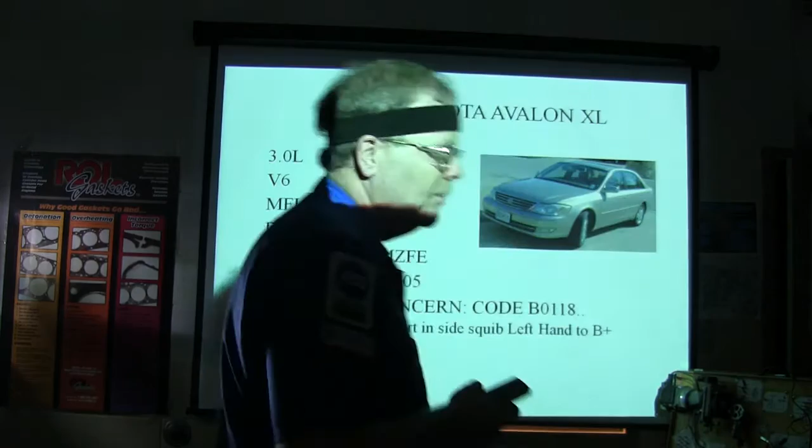We're going to go through a little bit of electrical stuff here. Toward the end of this thing, there's something I had covered before, but I like to go over it again because it's important to remember this stuff. This right here is a 2004 Toyota Avalon XL 3-liter V6 MFI DOHC, engine designation 1MZ-FE, and it's got some high mileage there. They had a

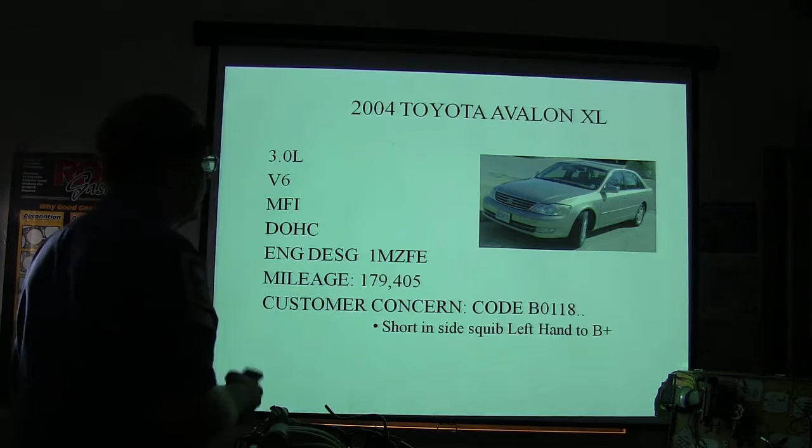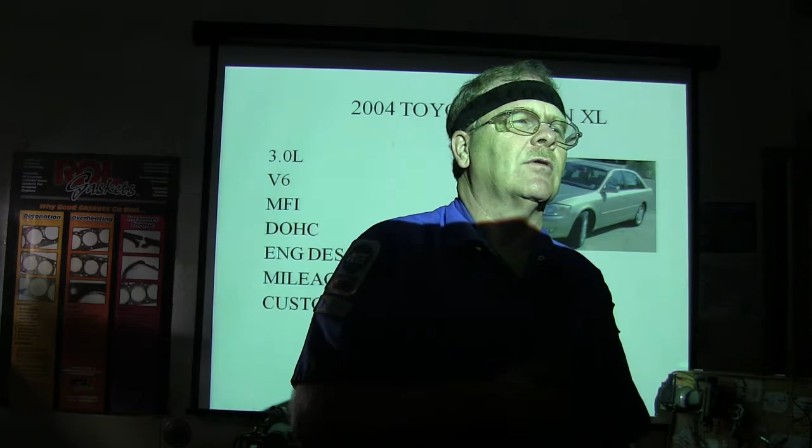B0118, short in the side squib, left hand, to B+. What is a squib? Somebody tell me what a squib is. I know what the problem is. Huh? I know what's wrong with it. What's a squib? It's made out of Japanese recycled beer cans. I know, but that doesn't answer the question I asked you. What's a squib? Somebody tell me what a squib is. Like a squib cake? No, squib.

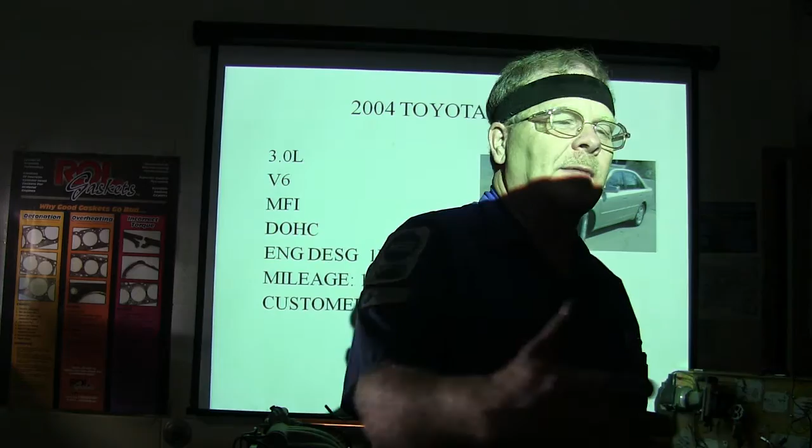If you look up squib in the dictionary, the definition of a squib is a firecracker. That's basically what's in the airbag that causes it to go boom. I don't know if you ever saw the video of the Lexus that we lit off, the passenger side airbag. It was the Lexus LS400, and when it lit off, that airbag went all the way to the seat and it busted the windshield. It filled up that whole place there. I don't know how there'd be any room for anybody there.

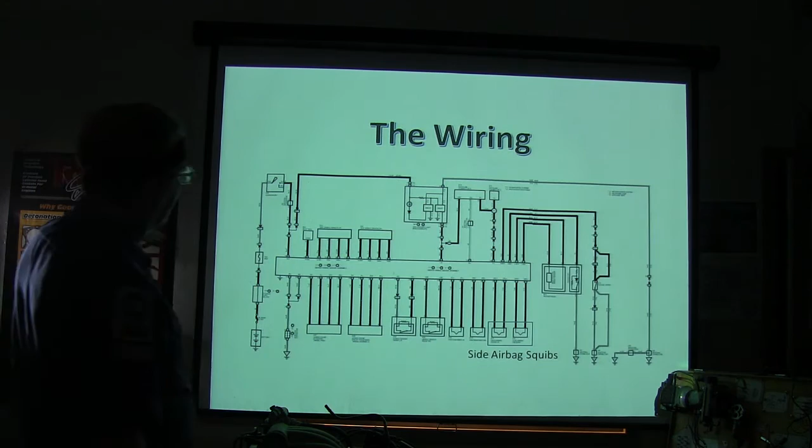But anyway, here's your wiring right here. And these are your side airbag squibs. These are the little firecrackers. You've also got seatbelt pretensioners, little small things, this is one right here. This is a seatbelt pretensioner out of a Crown Victoria. This one here was one that I replaced because it was open. Now, you're never supposed to take an ohm meter and measure these.

You might notice I got a shorting bar touching those two terminals together anyway. But I actually did the cardinal sin and went ahead and measured this, and it was wide open. If you measure it with a meter and the meter shoots enough juice through there to light this thing off, it's going to go boom. But this was on one of the college cars, and it was open as it could be, even when I pulled the little shorting bar out of it. And I did it from a distance. But it's not going to make a big explosion.

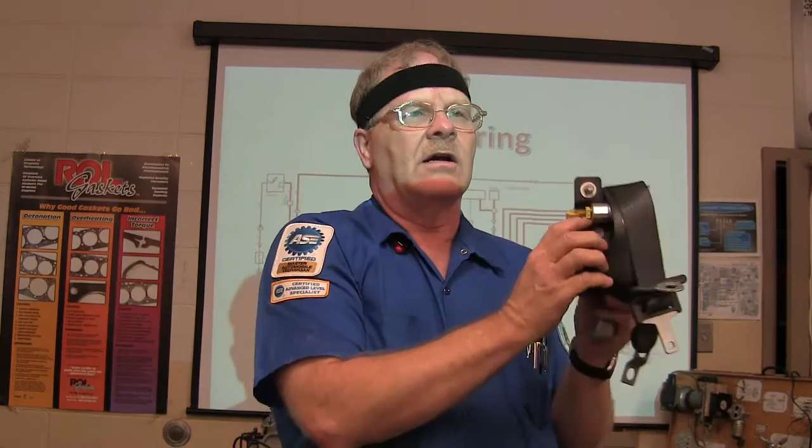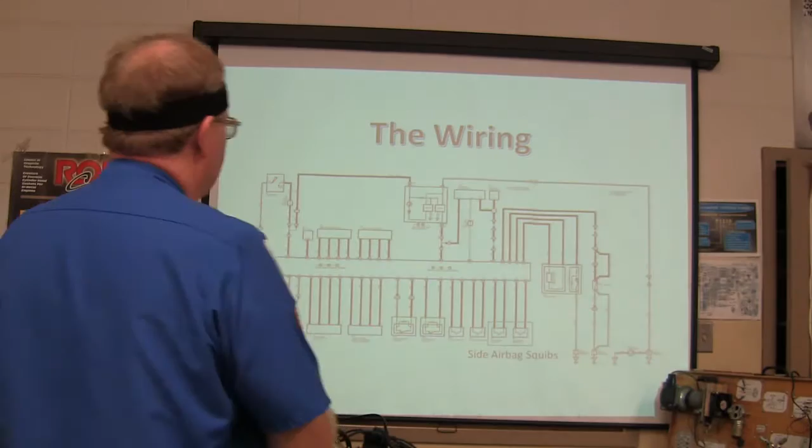This right here, basically it's got this little thing that locks the seat belt and keeps you from flipping forward. And that was about $140. I think I had to replace it to get rid of an airbag light. Anyway, on this particular one, here's an overview that I spliced together of that Toyota Avalon. And there's the squibs. And this one right here is the one that's in question. What you like to do whenever you're pulling a code like that is zero in on the part of the schematic that you need to focus on. And that's what we basically did here.

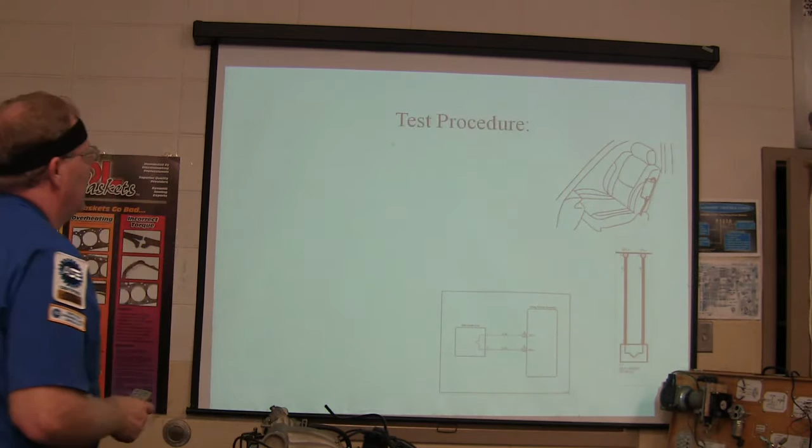All right, we got a test procedure here. Unplug the side airbag squib and see if the code's gone, and see if it sets a B0116. If it's setting a code saying it's shorted and you unplug it, it should set a new code saying it's open, right? Yep. What does that tell you? That tells me that the controller, the box that's setting the codes and looking at this, is seeing stuff out there that makes sense.

Now, if you unplug the squib and it still says it's shorted, what does that mean? Wires. Your wires could be touching, or pinched together, something like that. You see what I'm saying? They could be melted together, touching, connectors pushed back, and maybe the metal parts touching. So if I unplug that and it's saying open, I say, okay, from here all the way out there, my wires are good, right?

Okay, next you check the wire in between the center airbag sensor assembly module. That's the main airbag box, which is a sensor in addition to being a box on most of these vehicles nowadays.

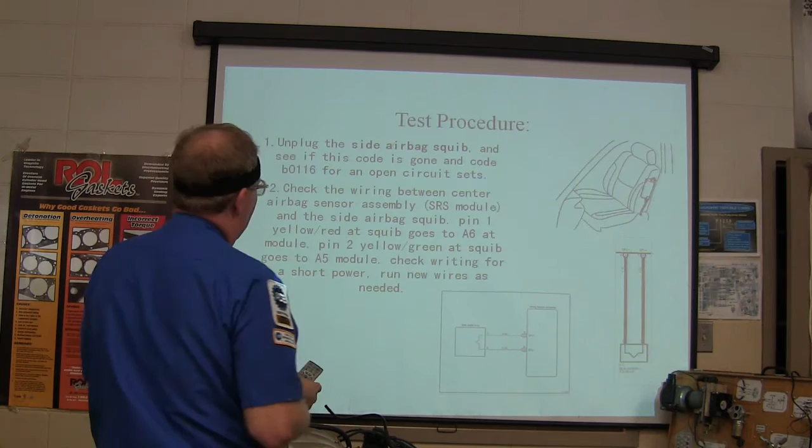And it's got a little sensor in it that whenever you stop, it slides forward and closes the contact. But anyway, the side airbag squib, pin 1, yellow, red, and the squib goes to A6 at the module. There'll be a pop test on this tomorrow.

You don't have to remember all these numbers. Pin 2, yellow, green, and squib goes to A5 module, check wiring. In other words, you see if it's shorted to power anywhere down here. You're directing between here and here. That's where you're at, right there.

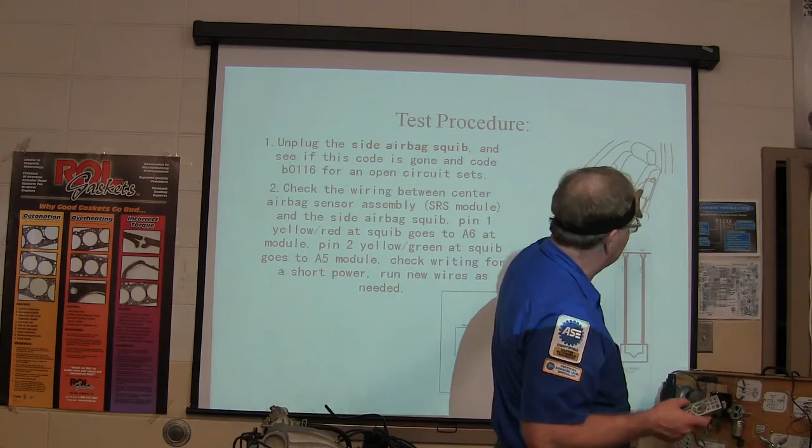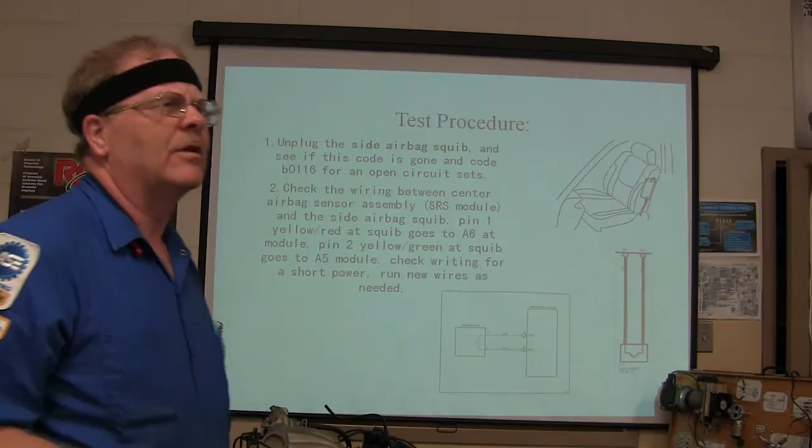That's the side airbag. This one pops out of the seat. And this is the one that I think is the only real good airbag that saves your life just about every time. Because a lot of people die when they get T-boned, their head hits the B-pillar, and this thing right here makes a soft cushion for that. That's a good airbag to have. If I could get rid of all the other airbags, the ones in the dash, I probably would. I'm not saying you should disable them, but I don't like those airbags.

About the airbags, my old car is an 07 Suzuki Forenza, and they actually had a recall because the airbag wouldn't deploy when you had an accident.

Was it deployed when you flipped it? If the airbags wouldn't deploy, sometimes that... I knew this one guy driving a pickup truck who got rear-ended, and when he went forward and hit the vehicle in front of him, the airbag lit off, and the cover that opens up to let the airbag come out, he hit that with his head and it sliced his head open. He wouldn't even have been injured if there was no airbag.

This kind of thing, I despise those airbags that come out of the dash. I don't know what in the world. They used to have the notion they were gonna have them come out from underneath the dash, big clear ones and all, but whatever. Anyway,

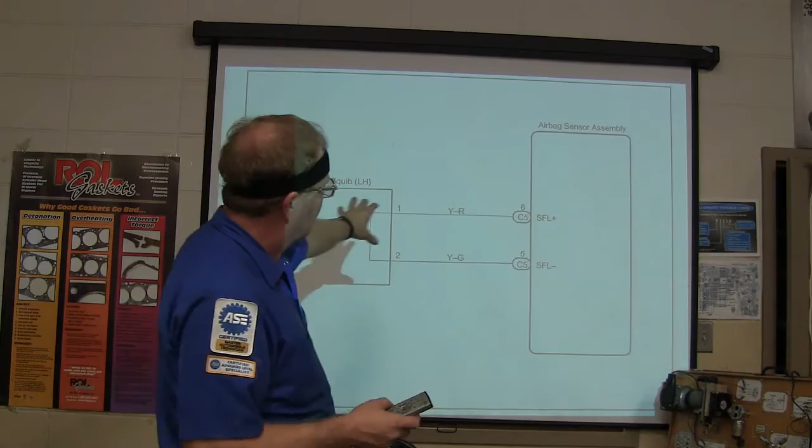If the wiring's okay, the module may have failed, okay, and this is basically what we're looking at here. We're looking at the side squib, and we're looking at just 2 wires. This is not complicated, but you do have to pinpoint the connector they're in.

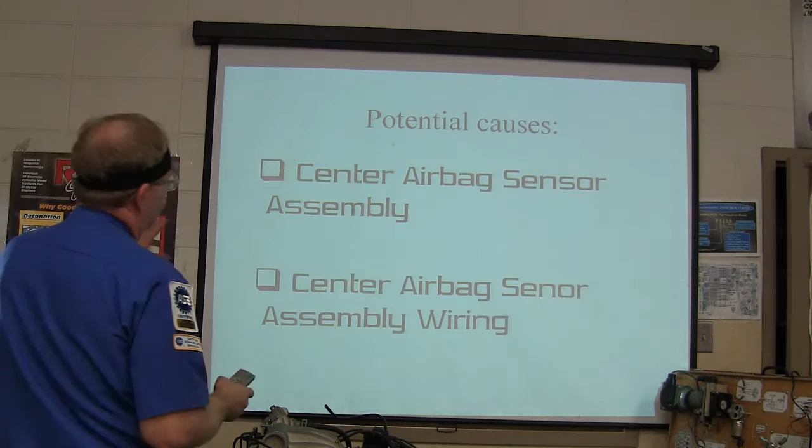Now, by the way, Rachel built this initially, or the one I used for a template for this, and she put all these animations in here: center airbag crash sensor assembly could be bad, center airbag crash sensor assembly wiring could be a problem, and all that. So, come on. Replace the center airbag sensor assembly wiring, not the sensor itself, but the wiring. And what we did was we ran new wires between the module and the squib.

Now that's something you gotta be really, really careful how you do it. I'm always saying, whenever you're working on electrical stuff, particularly accessories, don't modify. Now they replaced wires and that's okay, because they were basically putting it back like it was supposed to be, but don't ever modify anything like your airbag system.

Don't ever modify cruise control. You know what I mean? Like if you've modified the cruise control and the thing runs away because of it and somebody crashes and burns, the crash investigators are probably gonna come back and say somebody modified this, and then they go find out you did it, and the shop and or you may be in big trouble. So don't modify this stuff, leave it like it was designed, you know?

And that's basically how that goes. You can make adjustments on it, like if the cable needs to be adjusted a little, that's not a big deal. But if you're gonna do something, like this one I had, somebody had put LED tail lights on this Ford Focus. And when they did that, they lost their cruise control, because this cruise control module looked for a ground coming through the regular taillight bulbs.

So they said, well, you're going to have to put those bulbs back on there. Is there some other way we can get it to work? Let's say I've modified these, hit the brake, it neutralizes the ground coming through the bulbs, it drops the cruise. What if my modification goes south for some reason, and they hit the brake and it doesn't cancel and it runs away?

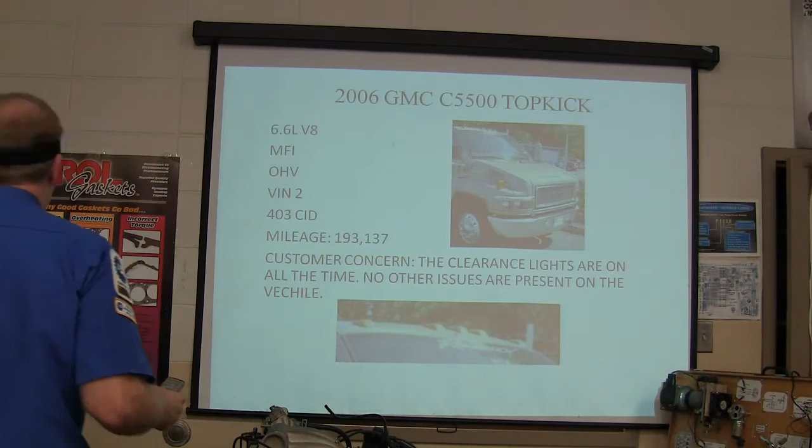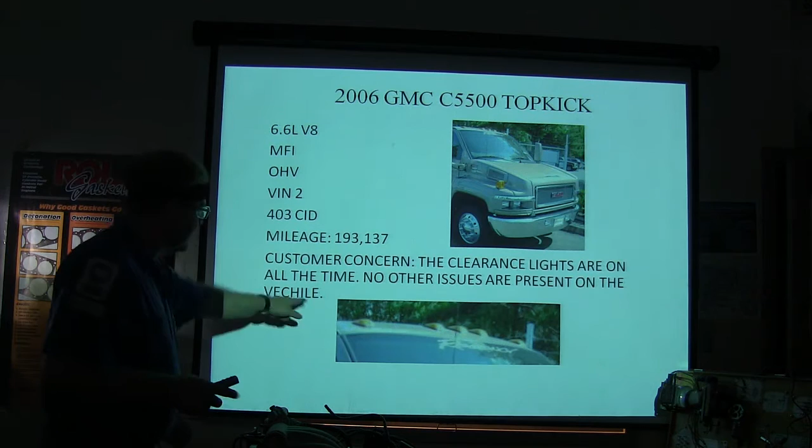This is a top kick, 6.6 liter V8, blah, blah. You've seen these big top kick things. The customer concern was the clearance lights are on all the time, no other issues present on the vehicle. Okay, so here we go, right here we got the test.

We're going to locate and remove the marker light relay from the instrument panel fuse block. If the lights go off, locate and repair the short to ground on the marker lamp switch circuit. What the marker lamp switch does is ground the coil on the relay, so you turn that on, the relay gets the ground, it clicks. There's grounding switches sometimes—the relay isn't always a power switch thing. If the circuit's not shorted to ground, replace the marker lamp relay.

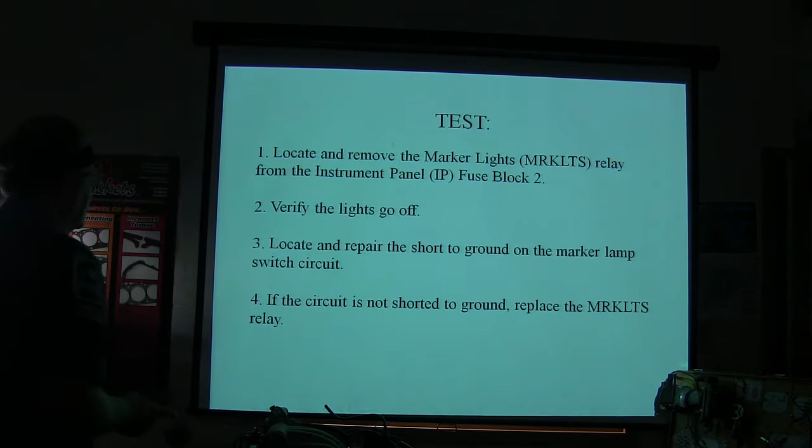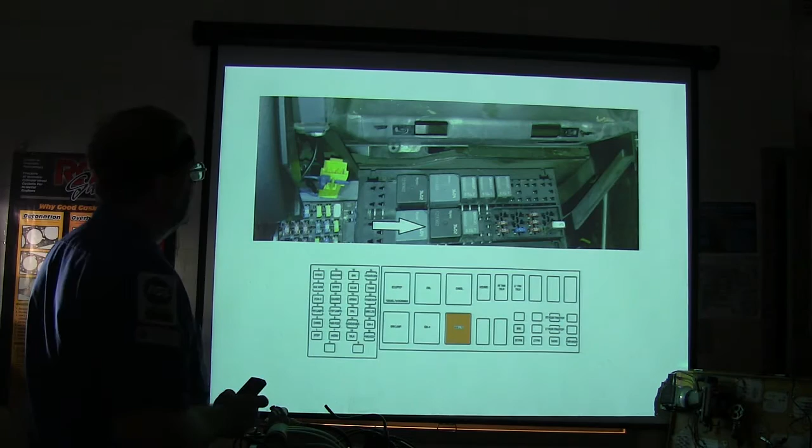Potential causes: marker lamp relay, marker lamp switch wiring. This is what we got here, that's what the relay looks like, and this is where it is on that particular vehicle. Whenever the smoke cleared, confirmed fix—we replaced the marker lamp relay.

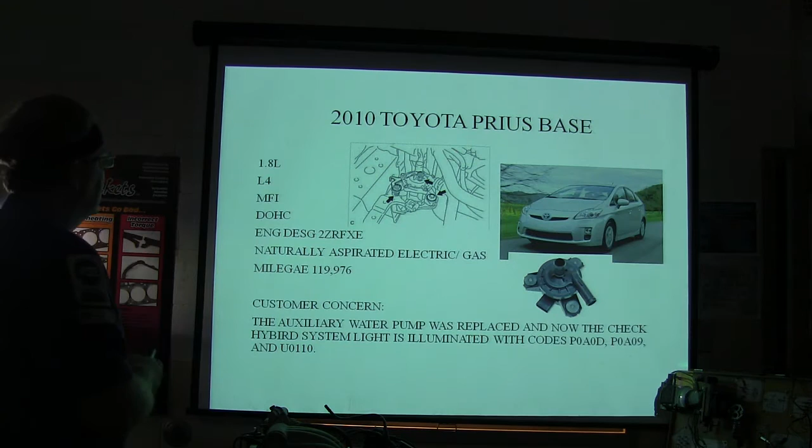Now we're going to talk a minute about a hybrid. This is what we got right here: a 2010 Toyota Prius base, nothing special about it. It's got a dual overhead cam, so on and so forth. The auxiliary water pump was replaced, and now the check hybrid system light is illuminated with codes P0A0D, P0A09, and U0110.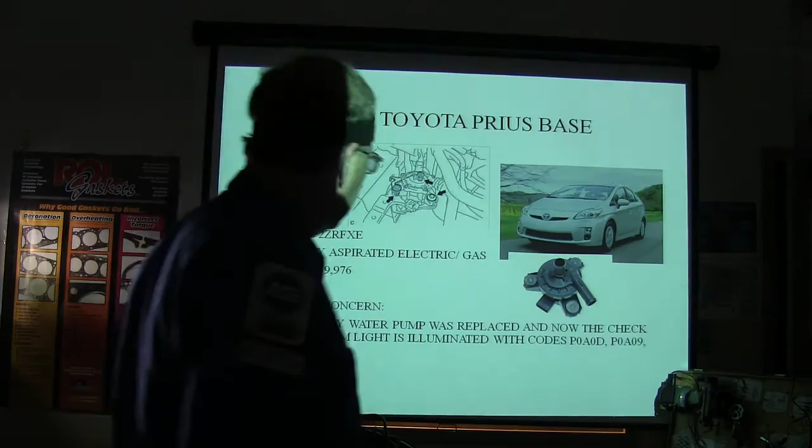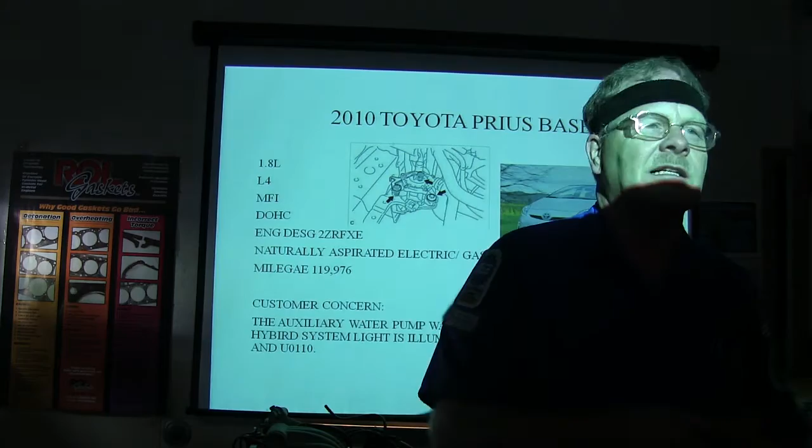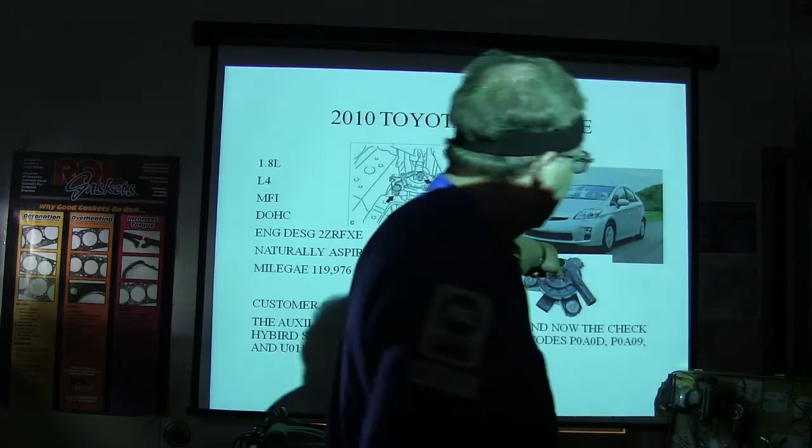This little water pump—you guys might remember from Special Topics 2—the hybrid system has its own cooling system. The inverter gets really hot; it's the thing that takes battery power that's DC and turns it into AC so the motors can run. That thing warms up pretty good because it's got those little IGBT transistors in there working so hard. So we've got special antifreeze, a dedicated cooling system, and a little auxiliary water pump that runs on AC. That particular one has got some issues on this car.

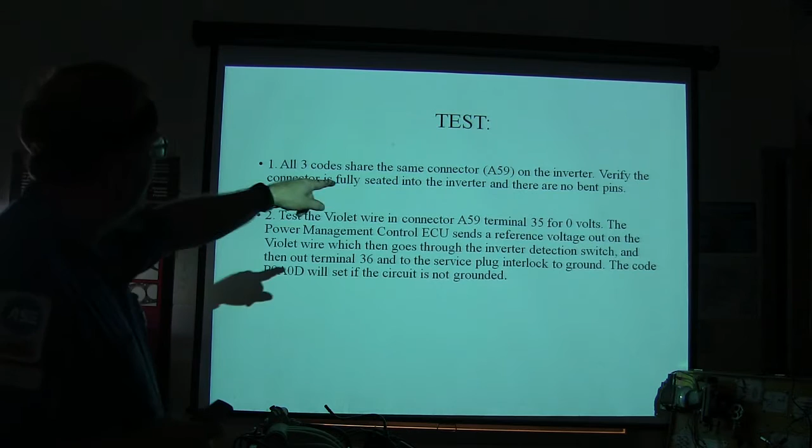All three codes share the same connector, A59, on the inverter. You've got to verify the connector is fully seated, and there's no bent pins.

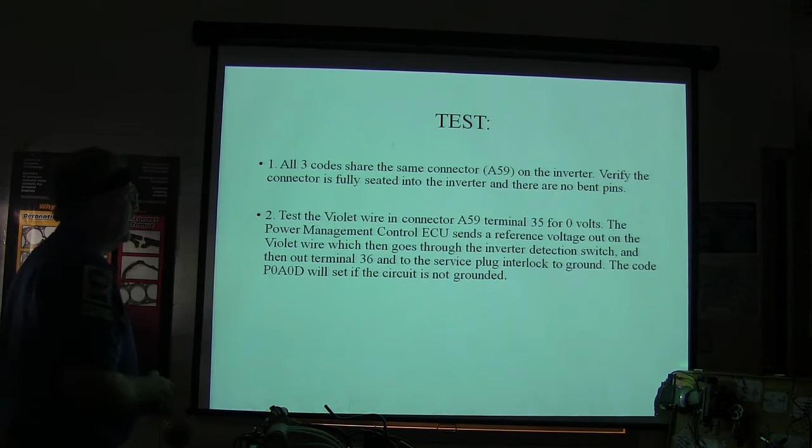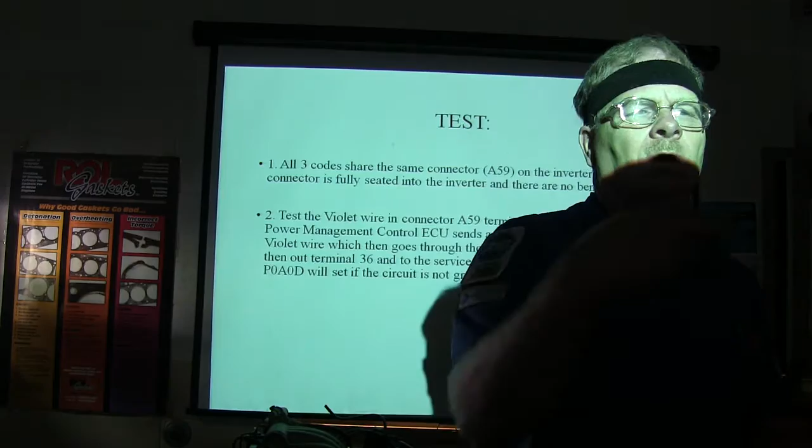You test the violet wire connector, A59 terminal 35 for 0 volts. The power management control sends a reference voltage out to the violet wire, and that goes through the inverter detection switch, and then out to terminal 36, and the service plug interlock to ground. There's a third wire in these harnesses that will know when it's unplugged, so it shuts the hybrid stuff down. That's some of the interlock we're talking about.

That's another story. Hello, come on, y'all. Let's go. There we go.

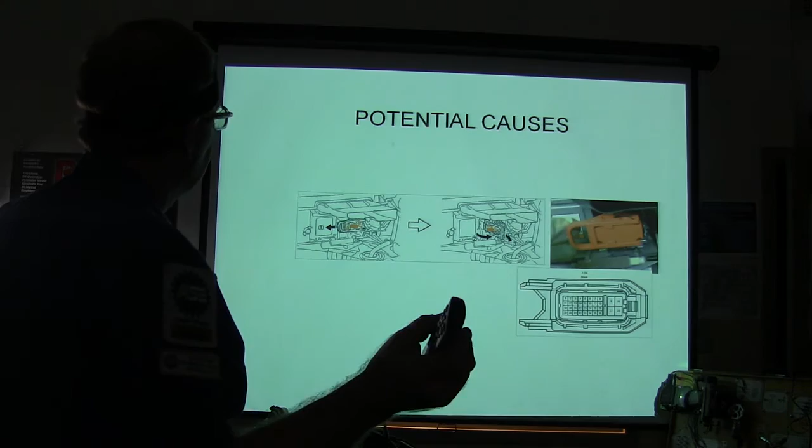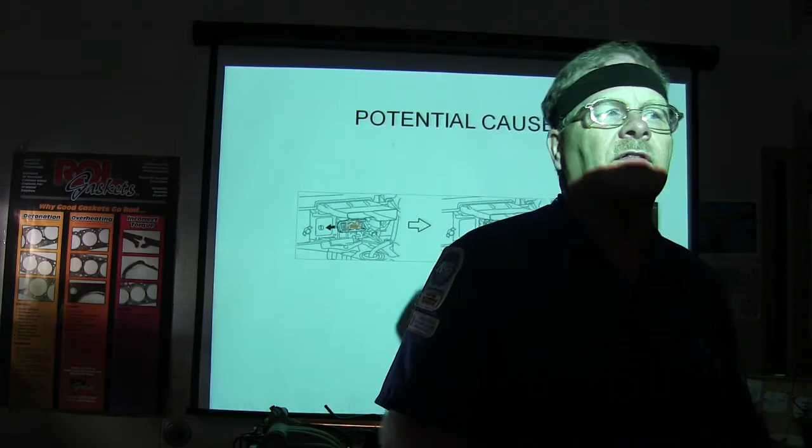Potential causes - there's your service plug. This is what you pull out when you're going to work on it, to make sure you don't get fried. After you pull this out, you let the capacitors bleed off because it's going to take them a little while to do that. Then there's your A59 connector right there. This is some of the stuff - your service plug grip, you know. There's a fuse in that, by the way, a big old fuse that looks like one that comes out of an old fuse box in a house, like the ones you see under police car hoods.

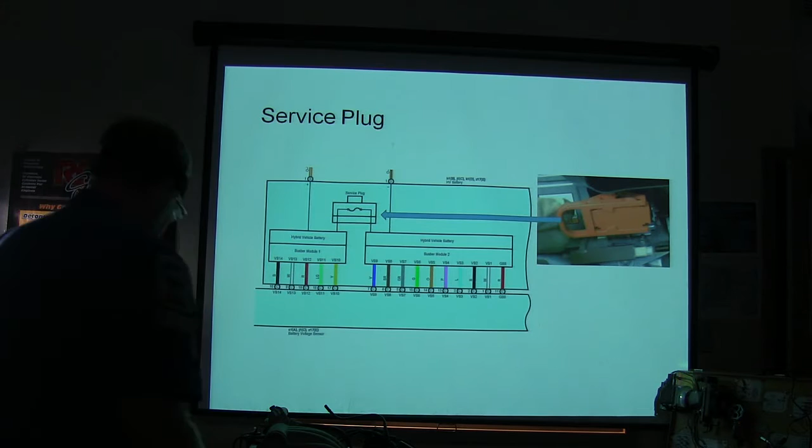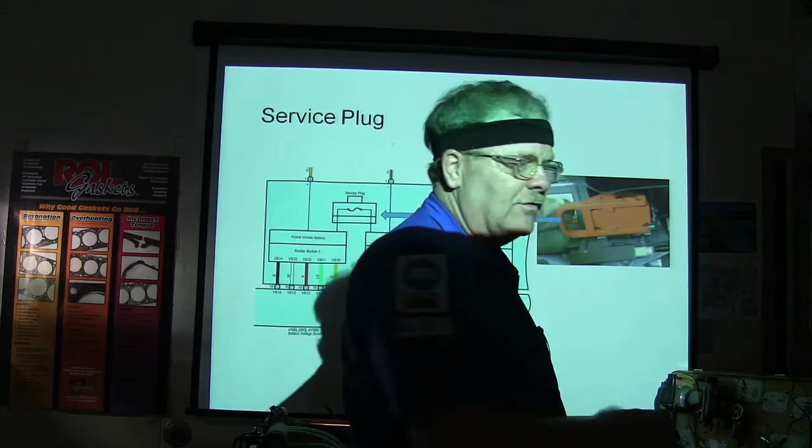Your hybrid inverter wiring can be the thing. This right here, incidentally, your hybrid vehicle battery is basically connected with this. When you unplug that, it's like a series circuit - you pull that out, you've taken part of the series circuit out and you shut everything down. That's what that's about right there.

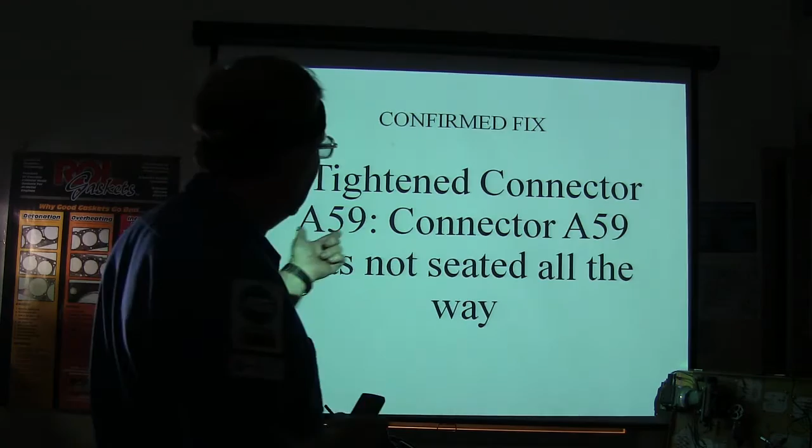A59 - notice this guy found that particular pin. We were talking about that last week. He found that particular pin in the inverter plug, and what he located, let me see if I can get this confirmed fix - tightened connector A59. Connector A59 was not seated all the way, so it wasn't locked in there like it should have been, and that turned out to be the whole problem through all those codes and everything else.

Now this '88 Ranger - some of you guys might remember, I told this story a while back, but it's an important thing to remember. I had a low alternator output.

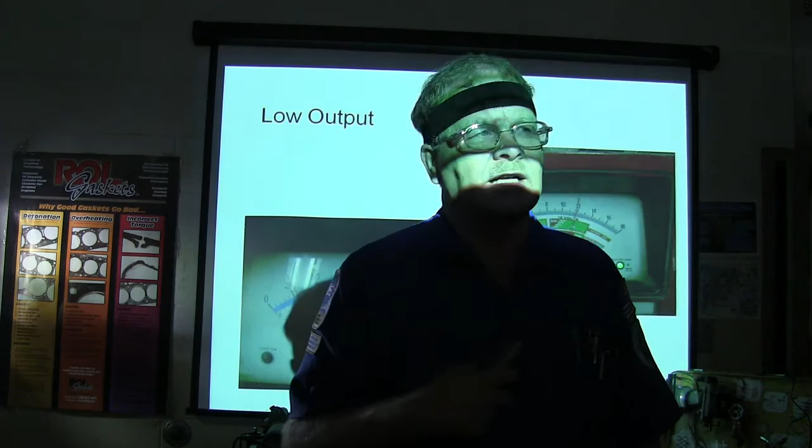The original story was the guy says, I went to AutoZone and bought an alternator, and very shortly after I cranked it up, I saw smoke coming from under the dash. He went back and told them their alternator burned up some of his truck, so they gave him his old alternator back and said bring it down to the Ford dealer, and if it turned out the alternator had burned it up, they'd pay for whatever damages there were.

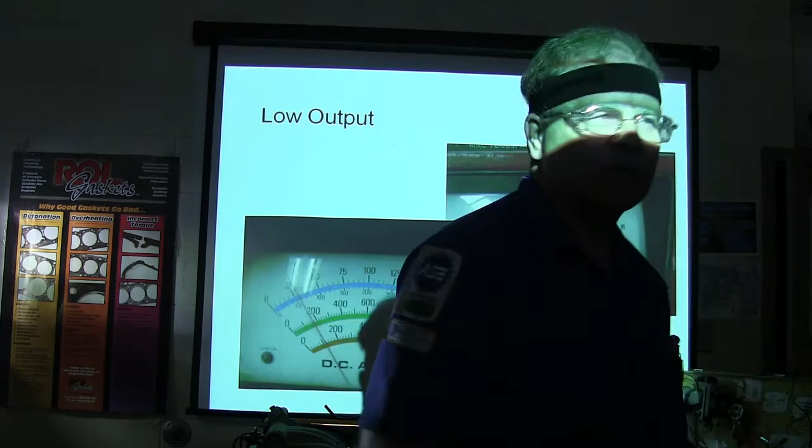The guy brought it down there, and I said I need the alternator they sold you and I need your old alternator to be on there. He brought it down with the old alternator on there. The alternator that was on there was loud and stinking and hot - you could smell it from 5 feet away. It was just an awful, burned up alternator, totally fried.

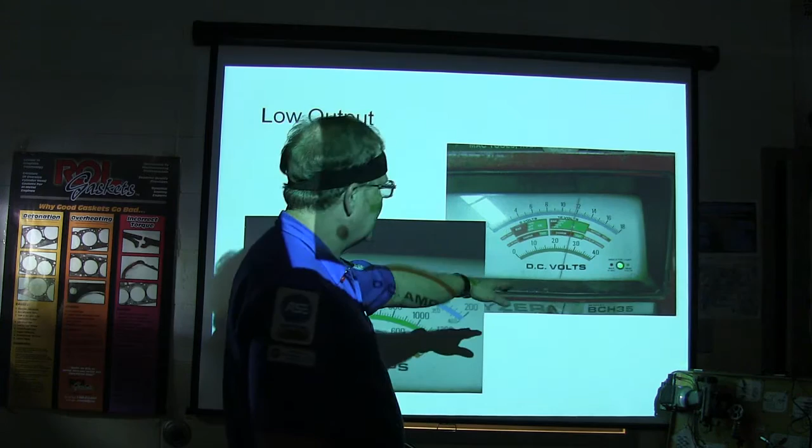I put the good alternator on there and hooked up my charging system tester - this one came from Mac Tools, BCH 35. Notice what I had right here? I had amperage. See my amperage? When you check the charging system, you ought to see on the voltage side if it's working good - 14.5. And then you'll see amperage over here, right?

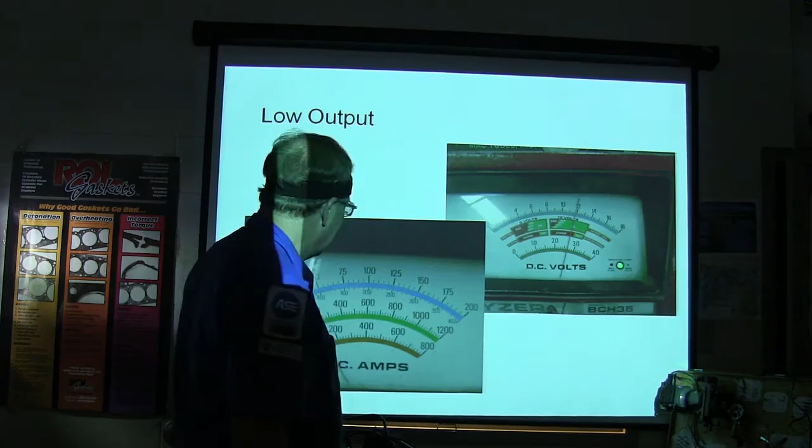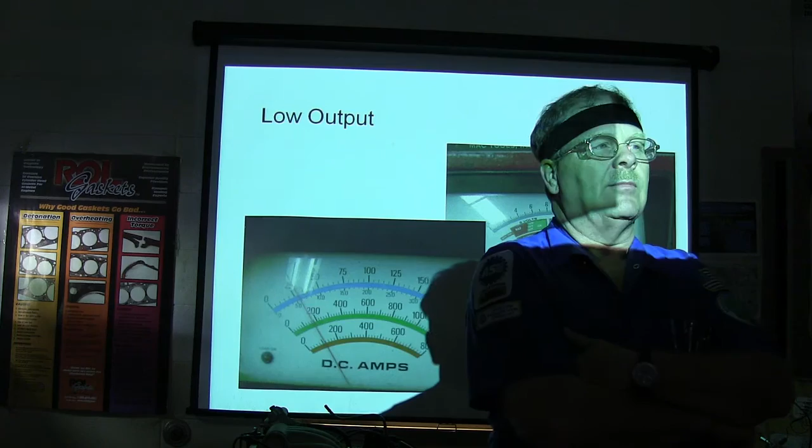I was getting an amperage reading, but I was just under 12 volts. Now what in the Sam Hill is going to cause that? Well, the alternator that was on there was just destroyed, and the one we put on there produced these kind of readings here. This is not the old alternator - this is the new one that came from AutoZone.

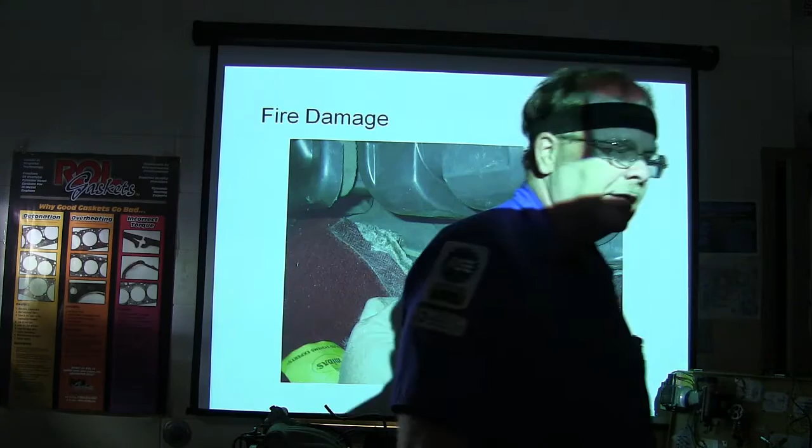So basically what I found, as I let it run a little bit, I saw smoke and stuff. I looked under the dash, and I found that the wires going to the inertia switch were all burned up and everything.

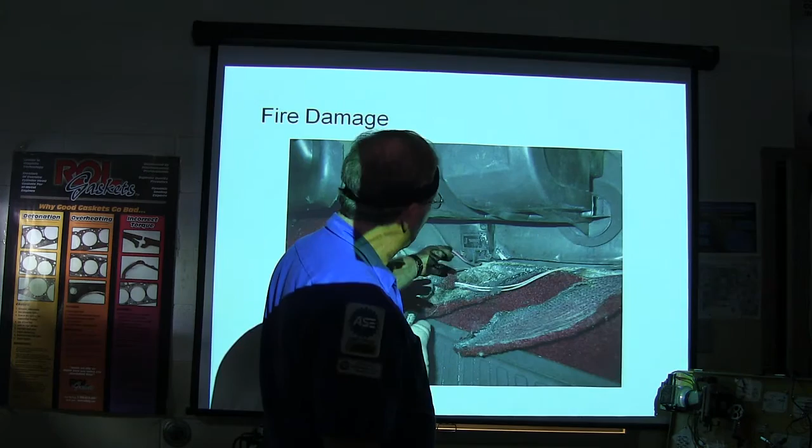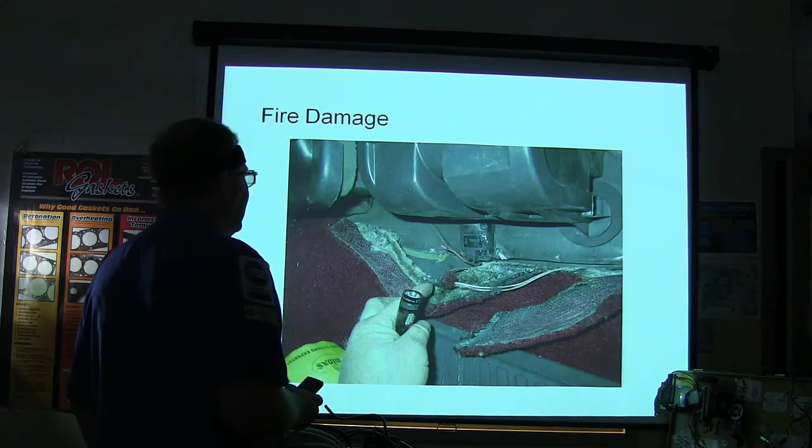And well, it had burned up the inertia switch, and somebody had bypassed the inertia switch, you know, with Scotchlocks and all that kind of stuff. And I said, this is not good. And so I said, I need to go ahead and fix this. So I went ahead and fixed it. And after I fixed that, I cranked it up, and I was sitting there watching things to see if there was smoke coming from anywhere else.

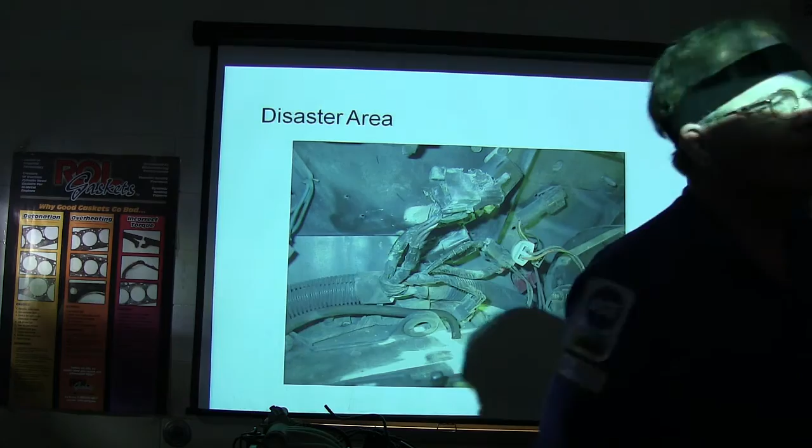And I saw a fire under the hood. I said, good grief, what's going on out here? So I went out there and looked, and the fuel pump relay had caught fire and was literally just about to burn the truck down. And I had to fire extinguish it and all this kind of stuff. I said, this is incredible. And this is the mess that was left after the fuel pump relay died.

And so, all right, are we seeing a pattern developing here? We burned up the inertia switch, and that was the weak link in the chain. And then we fixed those wires and made them stronger. And now we found another weak link in the chain. We set fire to the fuel pump relay. Oh, this is great fun.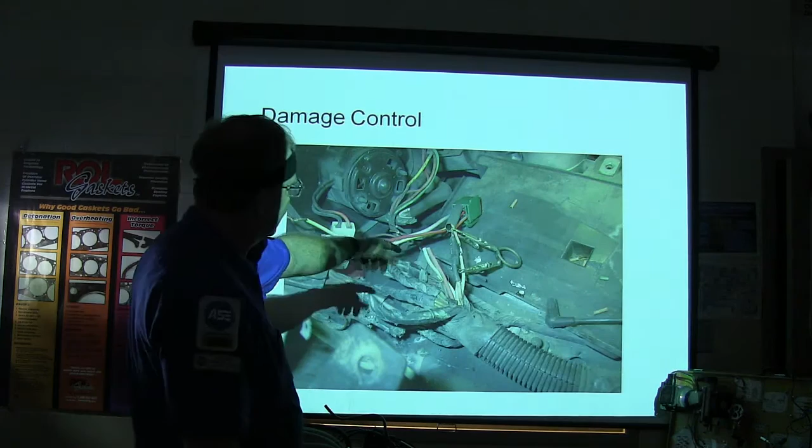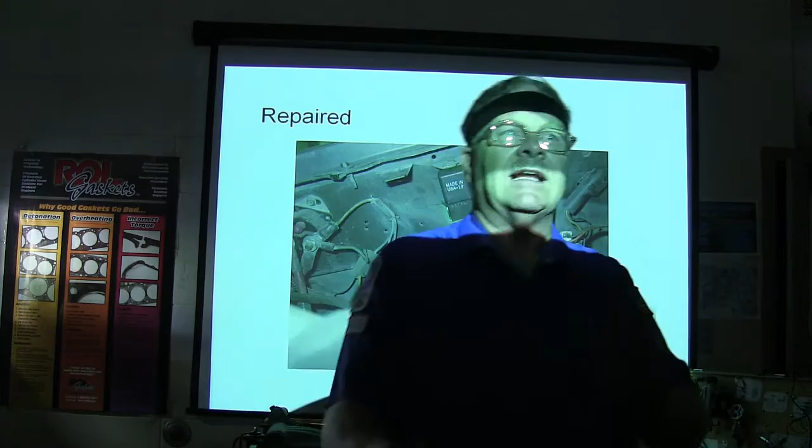All right, so basically I had to go back in there with my tool. You see my fancy little tool here, and I put a new connector on there, and you know, soldered those and heat shrunk them and all that stuff. And this is what it looked like when I got through working on it. We made it look like new again. We got the original style connector, we got a good relay and put it in there.

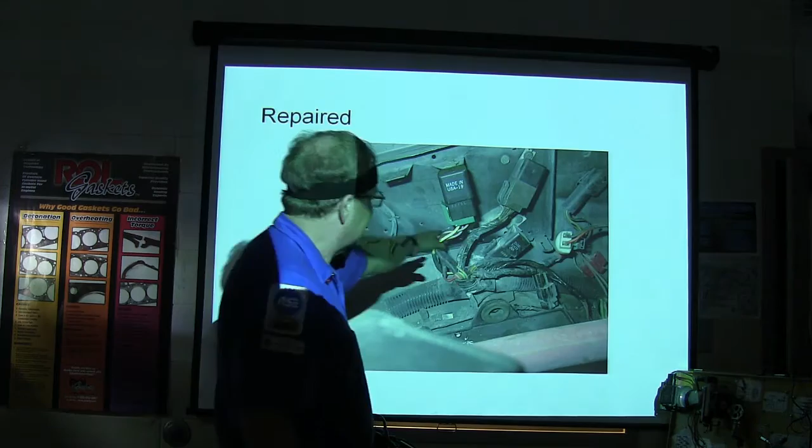That other one over there is the EEC power relay. There was a little damage down here on the AC relay, but the only one that caught fire was that fuel pump relay. That's pointing us in that direction.

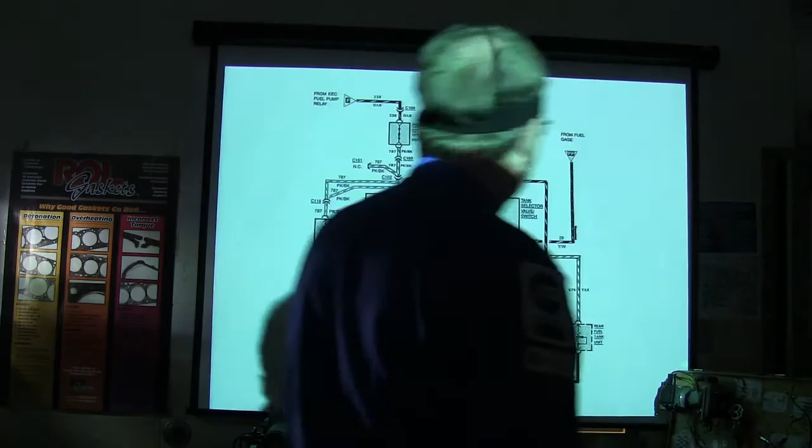Now, this Ranger, by the way, had dual tanks on it. It's real unusual for a Ranger to have dual tanks. And with dual tanks, you're going to have a fuel pump in each tank, right? So basically you see you got a pump in each tank, you got a tank selector valve, and then you got a fuel tank selector switch there.

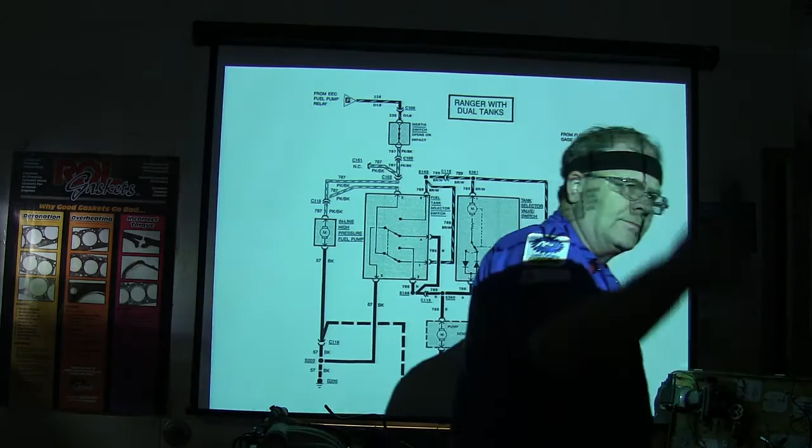So the long and the short of it is, that switch underneath the truck actually makes a switch. When this switch on the dash triggers that switch under the truck, it shuts off fuel from one tank and brings it from another. And of course you got an inline high pressure pump, but you know the one y'all just put in the Bronco that was the low pressure pump? It had a low pressure pump in each tank on this one here.

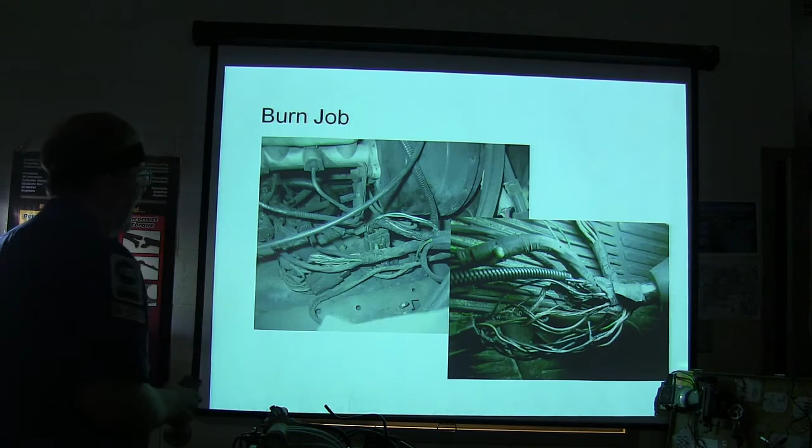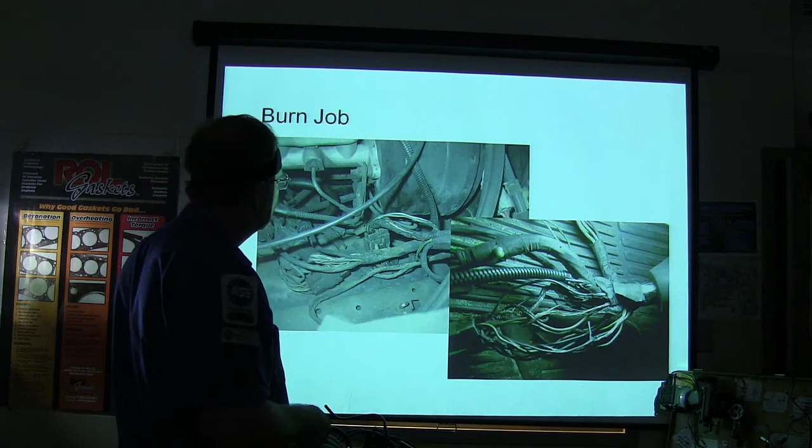All right, so I got to tracking this, and I found out there were more melted wires too. These wires right here were melted over there on the other side, and this thing had been getting really hot. You can see right here. This is what I saw, that I said, oh, this is a problem. And so when I split it apart, I saw all of this garbage right here. And I said, this is going to have to be fixed too. So I had to fix all of that.

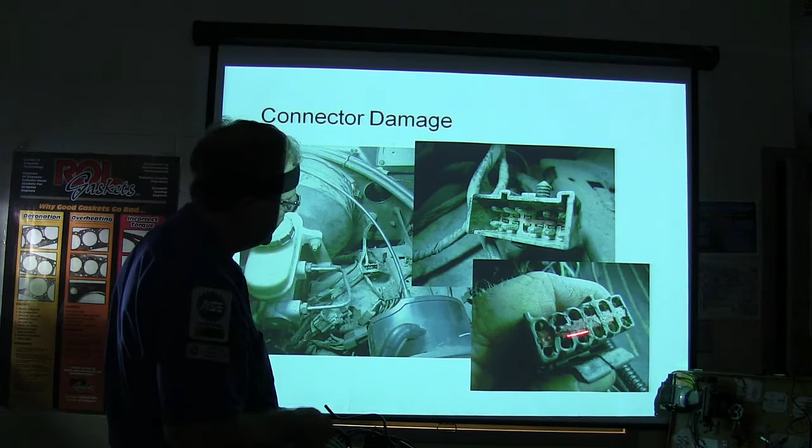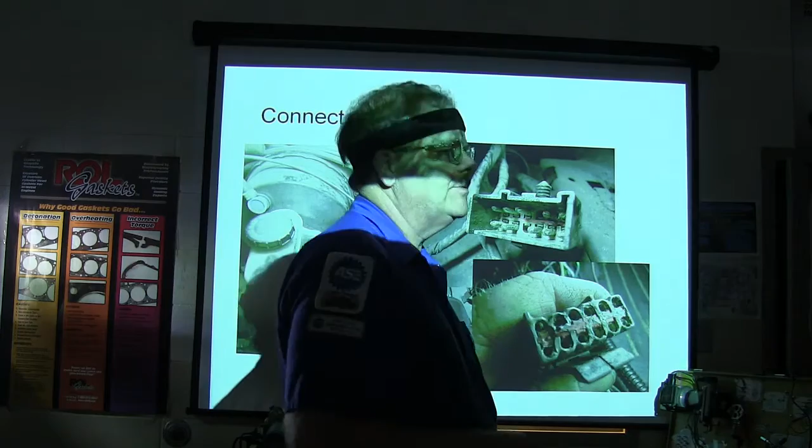And I noticed that when I disconnected this over here, that one had been hot too. See how that one was trying to melt? The whole connector was heating up and getting hot. If you're somebody that doesn't like doing electrical stuff, you think, oh, it's going to set fire to this. Well, backing away from it is not an option. In a situation like we were in here, you got to keep going until you figure it out. It's going to be fixed right when you do fix it. The melted tank selector connector. Look at that.

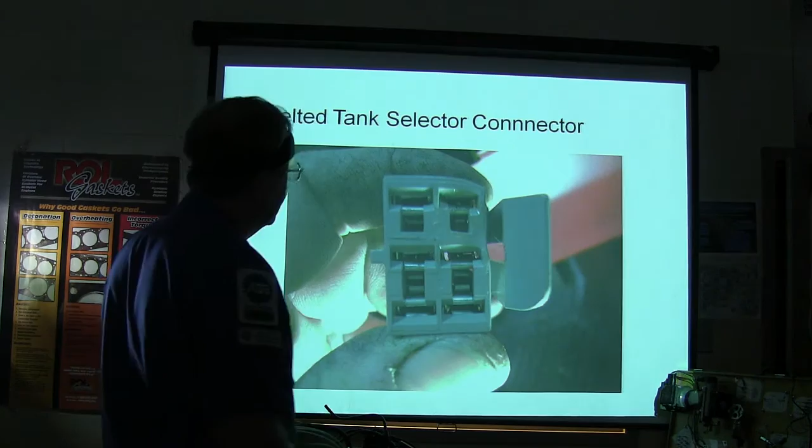All right, I believe that's my last slide, but I'm going to tell you what happened on that. And actually I did some measuring. It turned out that the fuel pump in the front tank, that's the long one that looks like a cigar, was pulling 40 amps. And how many amps is a fuel pump supposed to pull, even pumping fuel? Do you remember, any of you guys? I talk about it all the time. 4 to 8 amps. If it ain't pushing any fuel, it's going to pull about 1.5 amps.

But if it's pulling 40 amps, that wasn't enough to blow a fuse or burn up a fusible link, because it actually had fusible links. It didn't have a fuse on that. It would have blown a fuse on a newer vehicle, but that one had fusible links, which basically can take more of a surge without blowing. That's basically a piece of wire with Hypalon insulation around it that's made so that if the wire burns through on the inside, it won't be exposed to anything else, typically.

Okay, why was my alternator showing less than 12 volts? What happens on our Snap-on tester out here when we turn that load knob? Voltage goes down because we've got a load, right? The load on that one is a carbon pile that's wired between the positive and the negative cable. And so it's making a dead short to ground, isn't it? And that's what was going on there, except it wasn't a dead short to ground, but a 40 amp draw coming from the front pump.